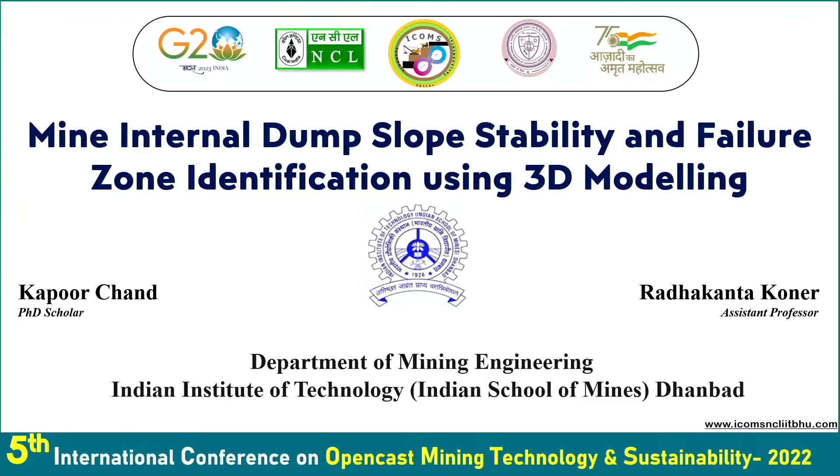Introduction: In India, major coal production comes from open cast mining, with 96% coal production from open cast mining. This mining method generates a large volume of overburden material in the mine area, and this material is accommodated in the form of internal and external dumps.

In the recent past, many dump slope failure events have occurred, resulting in the loss of human lives and mine machinery, causing production hampering, and sometimes damage to the haul way.

So in this study we are focusing on dump slope stability analysis using 3D modeling so that we can identify the failure zone and the stability of the dump slope.

Methodology: In this study we focused on three parts. First, data collection from the dump site. Second, failure zone identification using 3D modeling. Third, suggesting a mitigation approach for the failure zone.

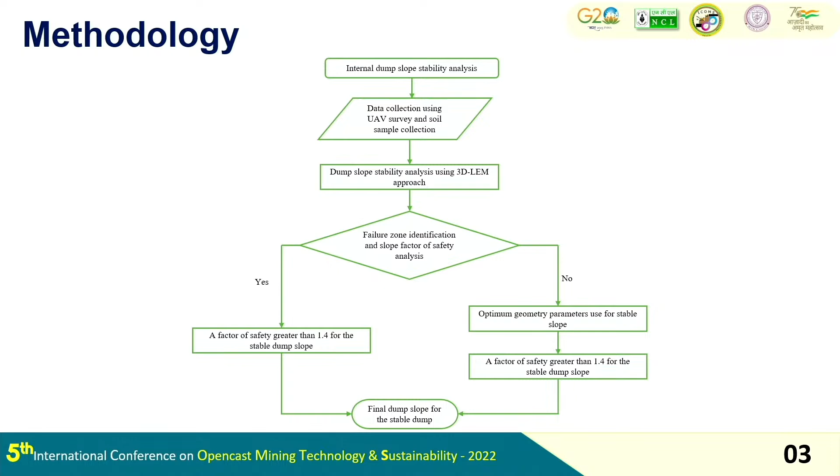In the methodology part, we are mainly focused on data collection because it is very important for slope stability analysis. Data collection is divided into three parts.

First part is the dump material data. This data is tested in the laboratory according to international standards so that we can identify the material property and density of the dump material.

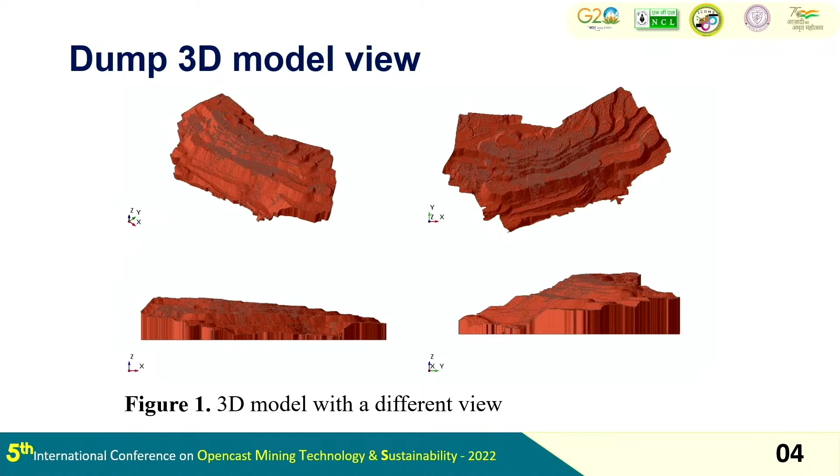The second part of data collection: we are collecting drone image data for the dump 3D reconstruction so that we can construct an actual and realistic model with proper image scaling, and analyze the critical zone in the mine dump.

For the third part, we are using image processing software, Pix4D and CloudCompare, to reconstruct a 3D structure. This 3D reconstruction will be in the form of a digital elevation model, which will be imported into Flac3D numerical modeling software for stability analysis.

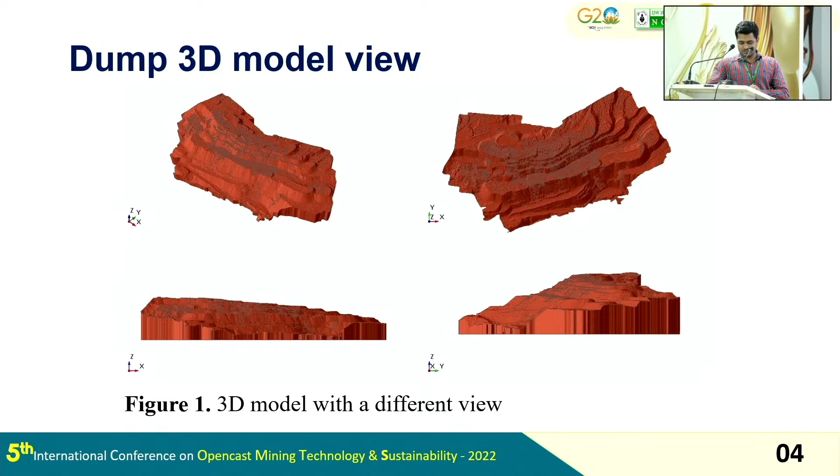This is the mine internal dump. This study is conducted in the Sonepur Bazari mine, and the total area of OB is 0.6 square kilometers. For the stability analysis, we are using Slide3D software.

It is a product of Rocscience, and for the stability analysis we are using the Mohr-Coulomb failure criteria. We are also using popular LEM approaches: Bishop, Spencer, and Janbu, and this result is for the static condition.

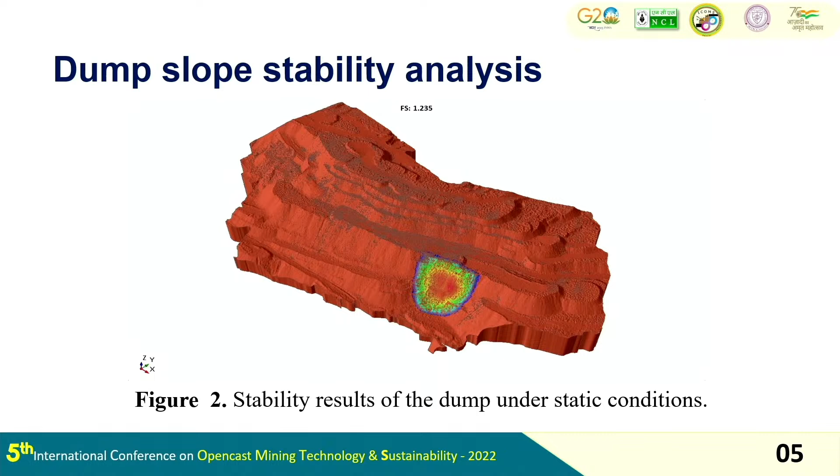The slope stability is also affected by dynamic loading and earthquake conditions. So in this study we are using pseudo-static analysis because our study area lies in earthquake zone two.

In this numerical model we assign a horizontal seismic coefficient for the stability analysis.

For the critical zone stability analysis, in this investigation we cut the model into multiple slices for detailed stability analysis, and the result is shown in the table.

For every section, stability analysis is done using Slide2D software, with the Bishop, Spencer, and Janbu methods used.

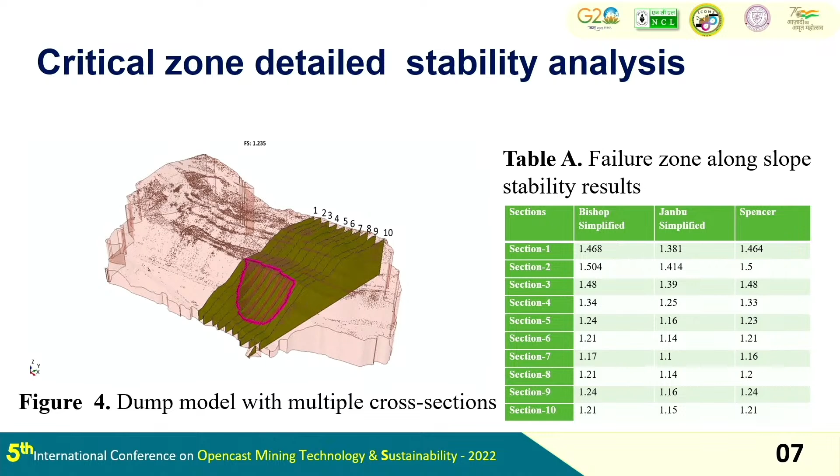This is our stabilization approach for the dump stabilization. In this approach, we are only focused on the bench width.

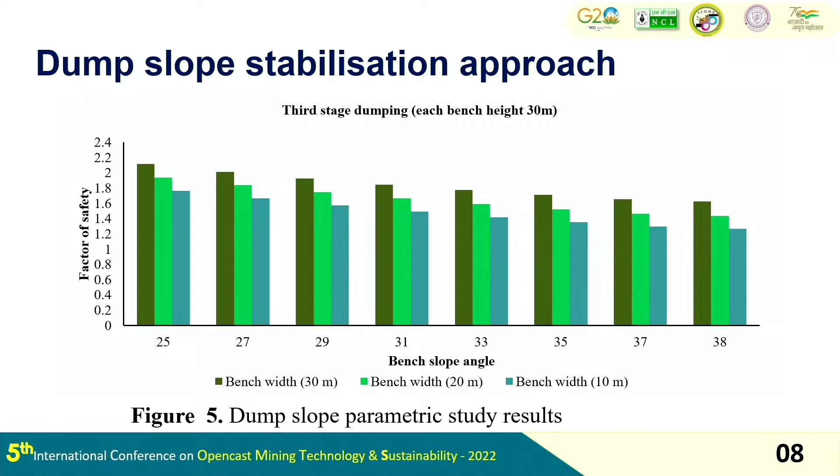In this result, we observed that as the bench width increases, the dump slope stability increases, and as the bench width decreases, the dump slope stability decreases.

This is the suggested optimum parameter geometry for the internal dump. In this parameter, we are only focusing on the bench width, with a slope angle of 38 degrees and a bench height of 30 meters.

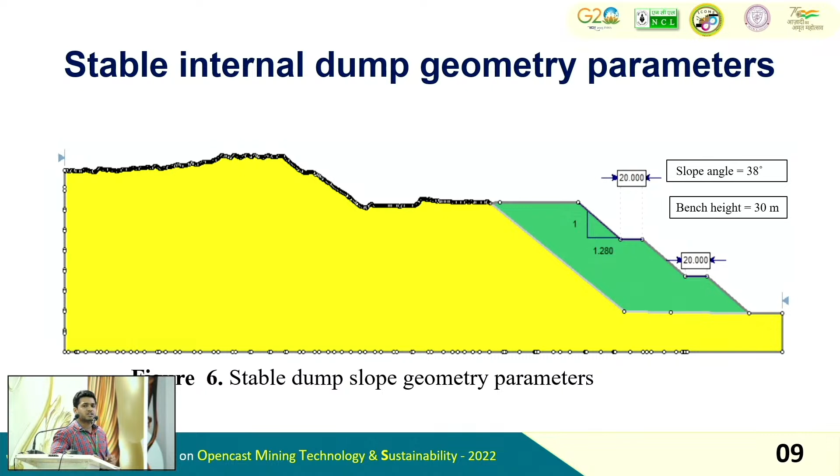This is the final result, comparing the present condition before and after implementing the optimum parameter for a stable slope.

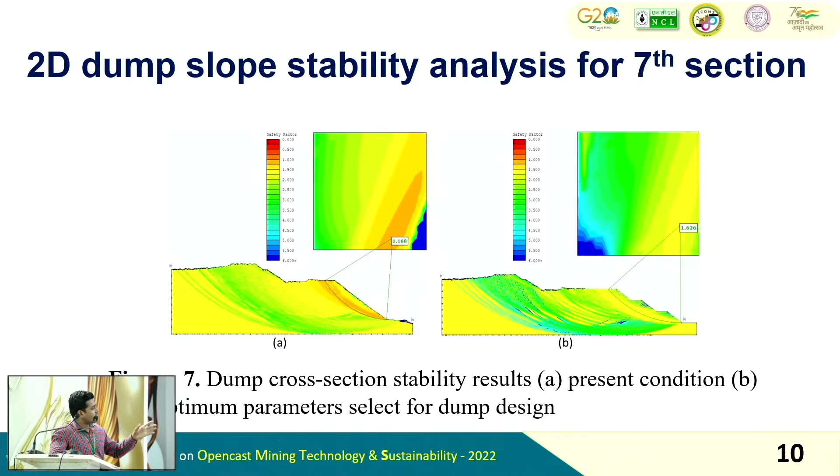Discussion: This investigation will be helpful for the mining industry for mine slope stability and failure zone analysis and its stability analysis. This investigation will also be helpful for landslide and man-made slope stability analysis.

This study is cheaper compared to other stability analysis methods, such as SSR and TLS.

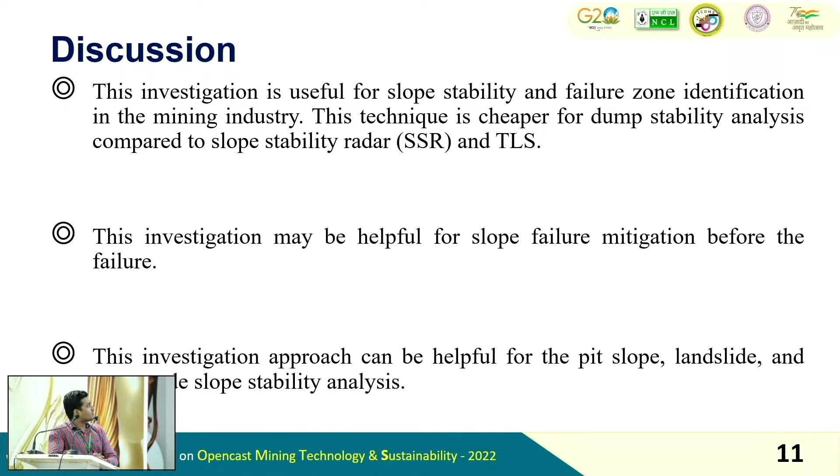Conclusion: the dump slope stability depends on the geometry and the strengthening parameter. The 2D numeric modeling will be helpful for designing purposes, but for failure zone analysis, we use 3D numerical modeling.

This work is supported by the Science and Engineering Research Board. Thank you.

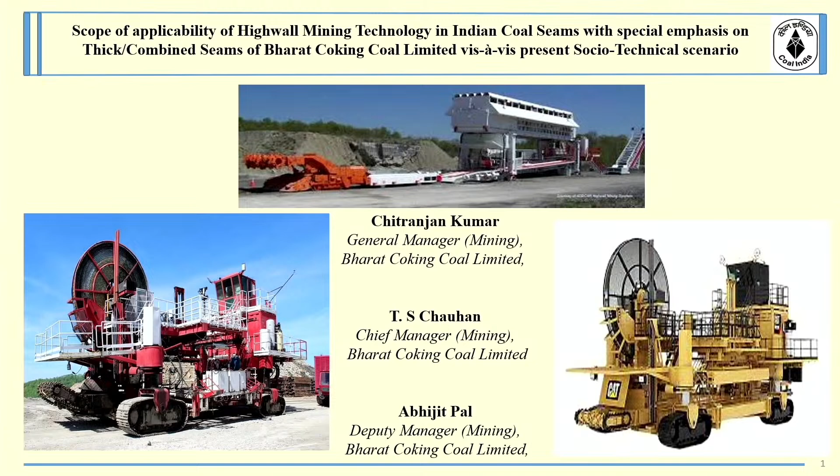Authors of this paper: myself Chitranjan Kumar, Area General Manager Block 2 Area BCCL; Tribhuvan Singh Chauhan, Chief Manager Mining Block 2 Area; and Abhijit Pal, Deputy Manager Mining in BCCL, Area 1.

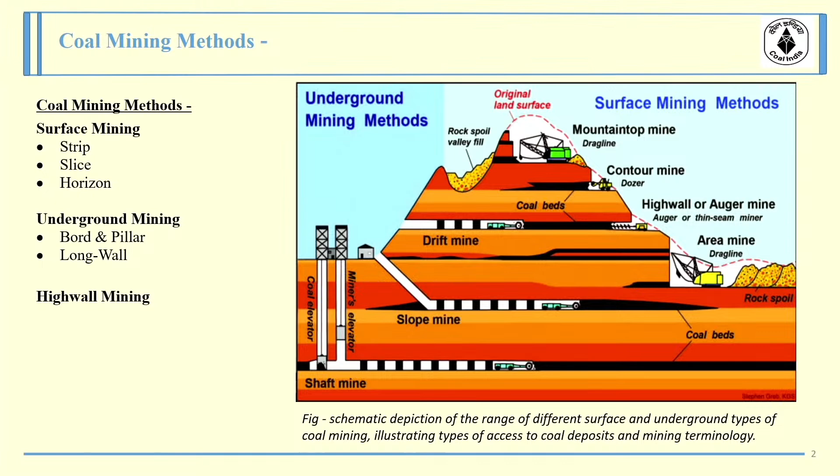This slide explains the methods of mining: surface mining and underground mining. Surface mining is categorized into three categories: strip mining, slice mining, and horizon mining, while underground mining includes bord and pillar, and long wall mining. This slide relates to that.

High wall mining is done where there is a problem related especially to land, which is the scarcest resource in the mining industry. Coal India is also thinking about applying high wall mining in different subsidiaries, mainly due to land acquisition issues. Wherever land is available but there is habitation over it, or a village is very near, we are unable to do underground or open cast mining. In such places, we opt for high wall mining, and I think 6 to 7 projects have already been awarded in this mode.

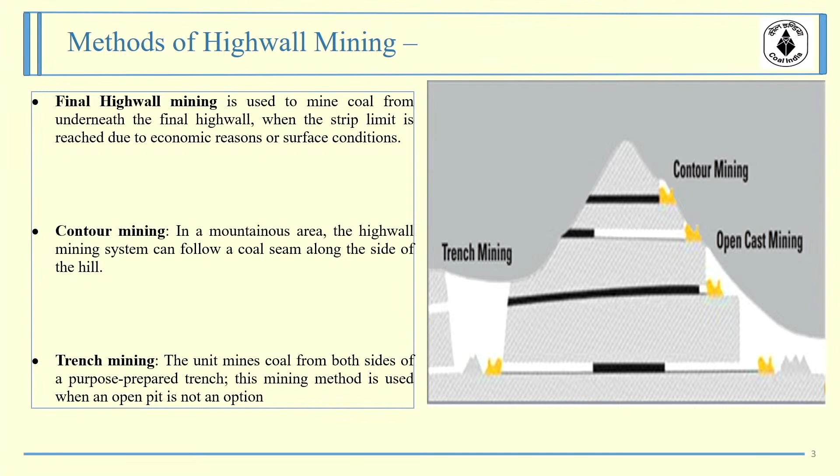All of you might already know about high wall mining. There is a cutter head which goes inside the coal seam up to a distance of 50 meters to 300 meters, which may even be longer. As far as the machinery is concerned, the width of the cutter head has been fixed at 3.5 meters. Most of the machines supplied are manufactured by Gainwell, and the width of that cutter head is 3.5 meters.

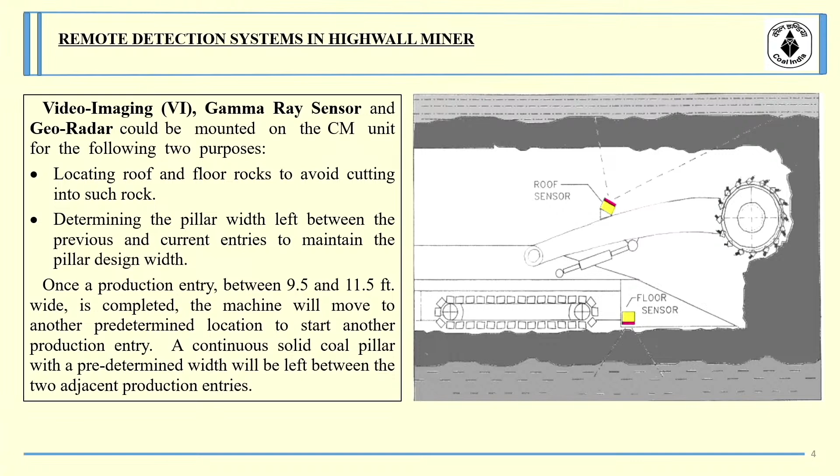You can increase the height up to 4.5 or 5 meters, depending on the thickness of the coal seam. But the width of the cutter head is fixed, and sensors in the cutter head sense the alignment of the gallery so that web pillars, meaning the pillar between two galleries, maintain proper alignment and constant width throughout the extraction of coal. Otherwise there may be a chance of collapse. Many sensors are fitted in the cutter head.

There's a sensor for measurement of hardness, in case you encounter any dike or sill. That sensor will sense it, and after that you can maneuver your action. The movement of the cutter head can be restricted or organized as per the hardness of the rock.

Potential for improving mining safety and health: in high wall mining operations, only the continuous miner and the push beam conveyor system go underground, while the miners and other mining and haulage equipment remain on the surface. Therefore miners are not exposed to common safety hazards associated with underground mining, such as roof and rib fall, because men are not going inside the gallery. So if there is a chance of roof or rib fall, there is safety.

Hazards with mobile mining equipment are reduced because it's manless mining, as no one goes inside the gallery. In case of mine fire and explosion also, there is more safety compared to underground mining. Exposure to coal dust that causes coal miners pneumoconiosis and other illnesses is also restricted to a greater and substantial extent.

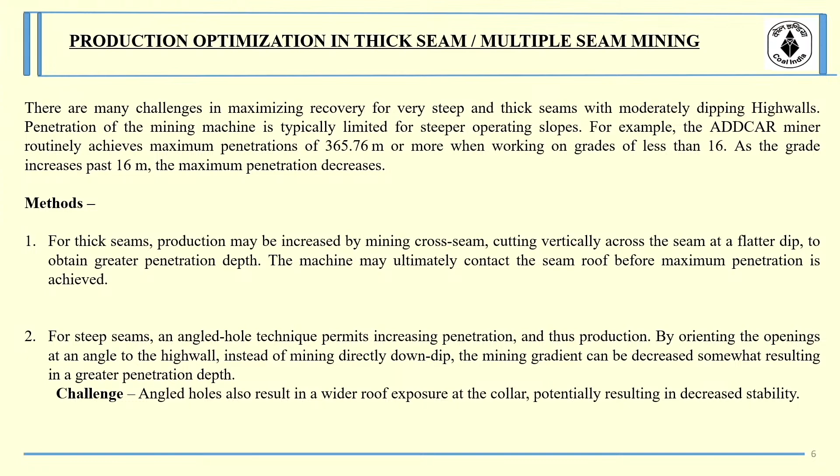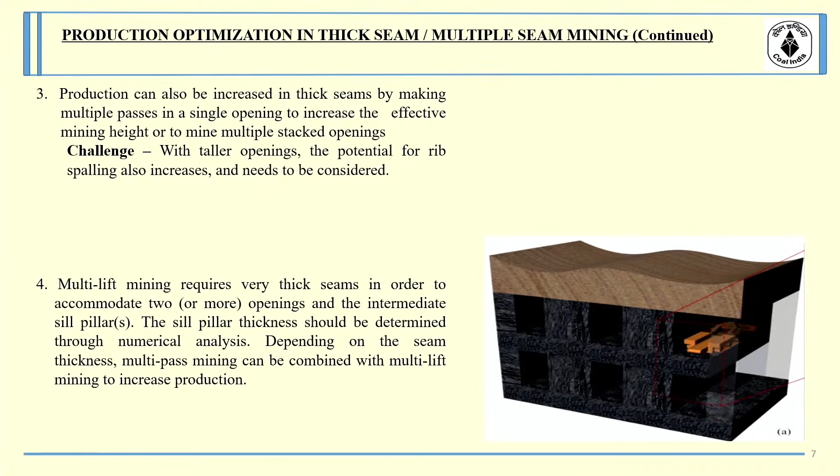Actually, at most places except Tata Steel, coal has been extracted in a single layer. In Tata Steel also, multi-level mining has not been done. In case of a 24, 25 or 30 meter seam, how can this be done? This is the question. How many layers should be there for extraction? Will there be stowing or no stowing? These are the questions, and how factor of safety of the pillars will be calculated in these conditions. This is a very important question for which we are presenting this paper.

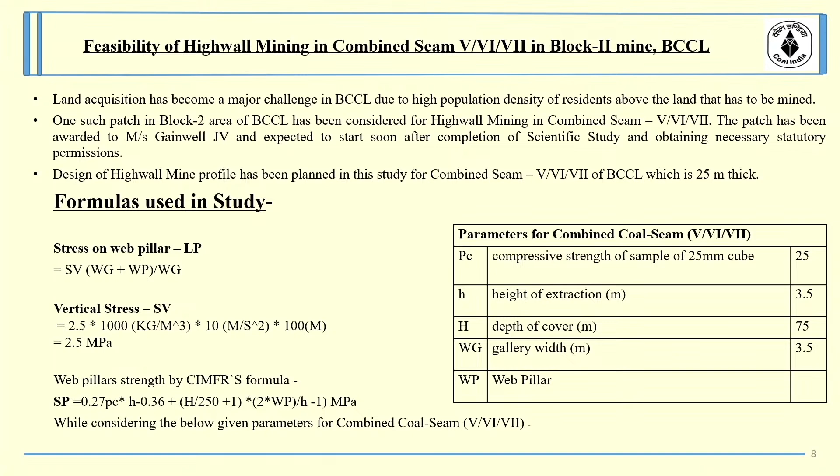This is the formula given by CIMFR. Stress on the pillar and vertical stress is calculated by this formula, and strength of the pillar is calculated by applying this formula. Factor of safety of the pillar is calculated.

In different papers related to high wall mining presented by DGMS and different academia, we have seen that if the factor of safety of any pillar is more than 1.5, that is considered safe for the purpose of high wall mining. So we are considering this 1.5 factor of safety, and going for further advancement in this paper.

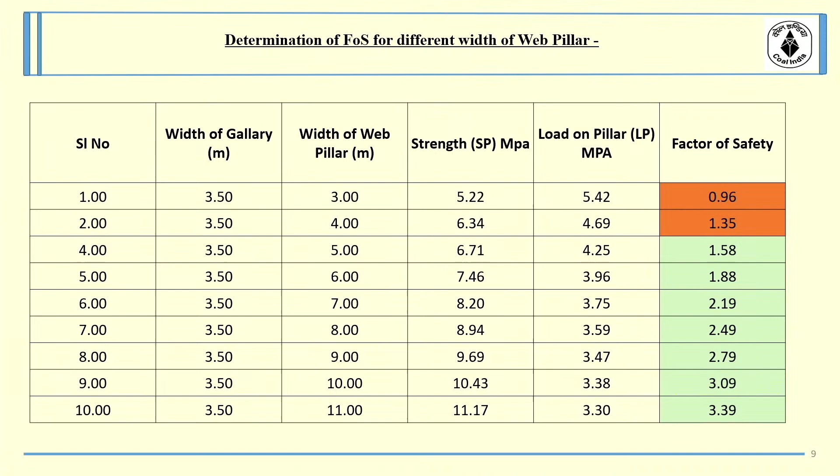You can see in this chart, the width of the gallery, meaning the width of the cutter head, is constant at 3.5 meters. Width of the web pillar is increasing, and with increase of width of web pillar, strength of pillar is also increasing. Load on pillar in megapascals is decreasing from top to bottom, and factor of safety is also increasing. It means for a seam, if you go further down, depth will increase, then factor of safety will decrease.

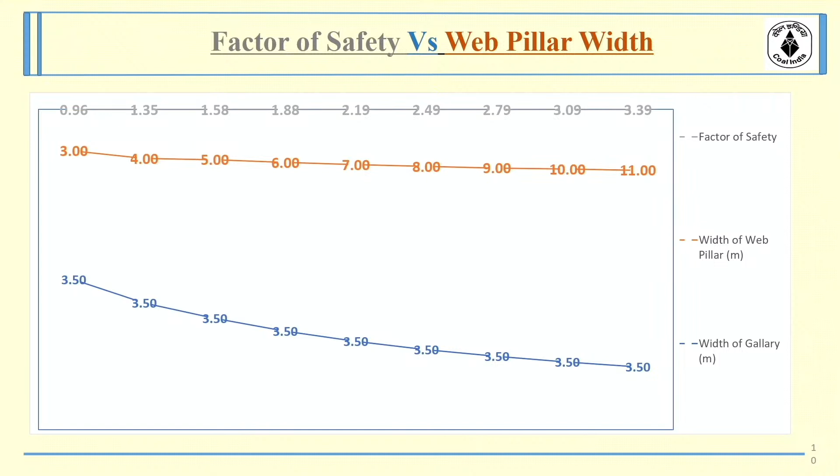And next, for thick seam which is more than or about 25 meters, we have considered depth cover 50, 60, 70, and in different conditions this has been calculated, factor of safety and percentage of extraction has also been calculated.

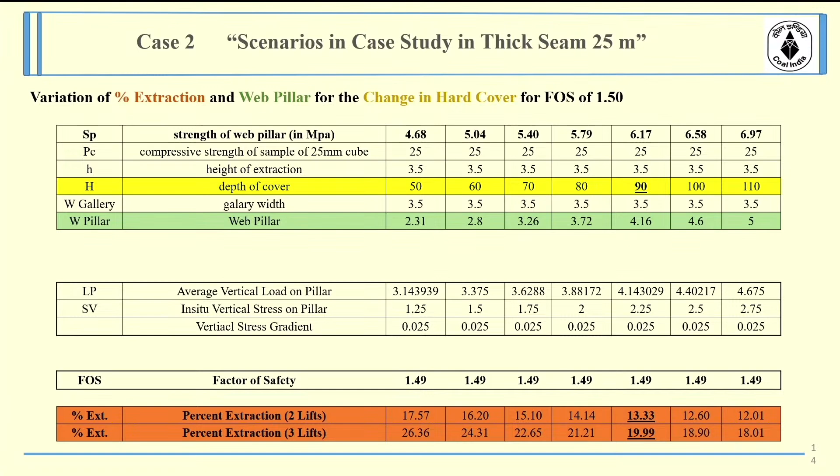Coming to the previous slide, percentage of extraction has also been calculated. You can see that if there are 2 lifts and 3 lifts, in that condition it has been shown what will be the percentage of extraction of the coal. And the same nature of graph, how that will increase or decrease depending on the depth and on the width of web pillar, that has been shown.

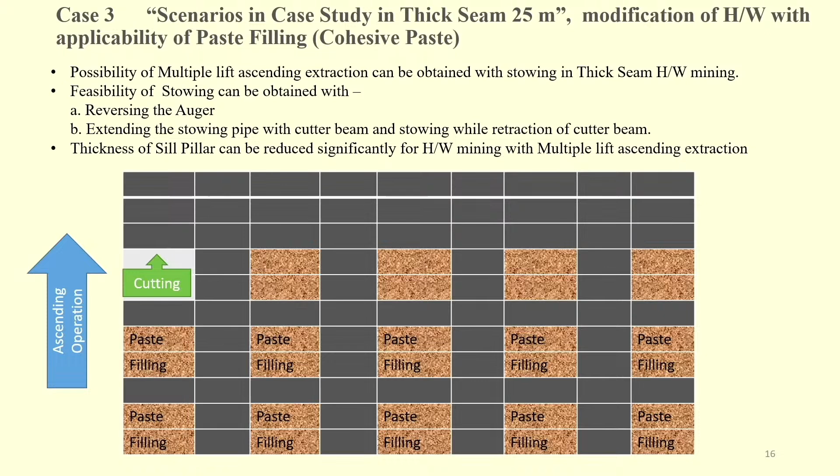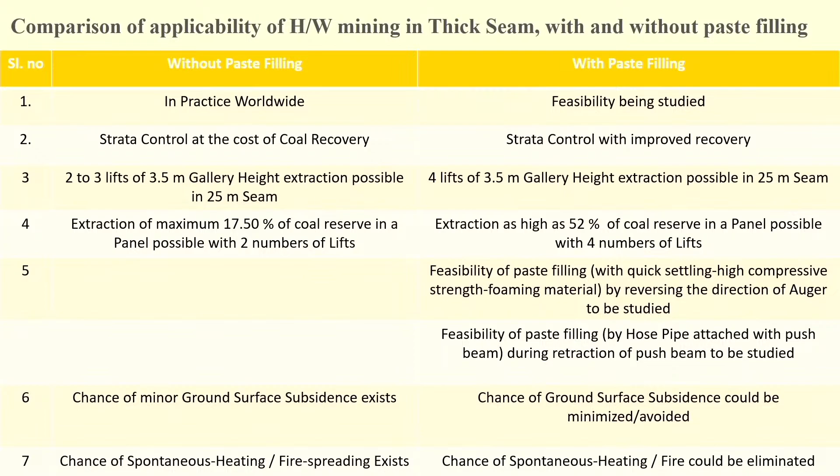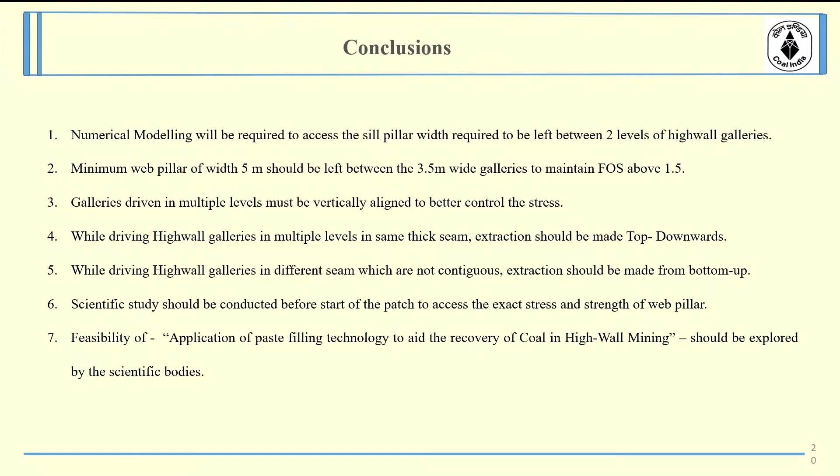Next, the same has been shown, same graph, this is without paste filling, what are the advantages and disadvantages of with paste filling. This has been shown, and the conclusion is that in that case we should go for high wall mining. It is a very good system, a safe system, and academia and scientific agencies are required to go for further studies and further research so that it can be made more feasible in present days.

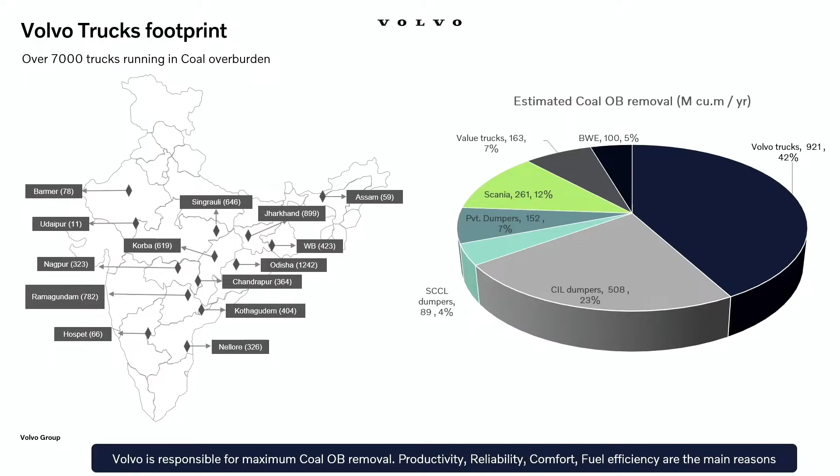One such feature is the inclinometer, which prevents the body from lifting while reversing the truck if the haul road or the dumping site is not proper—it will hold it instead.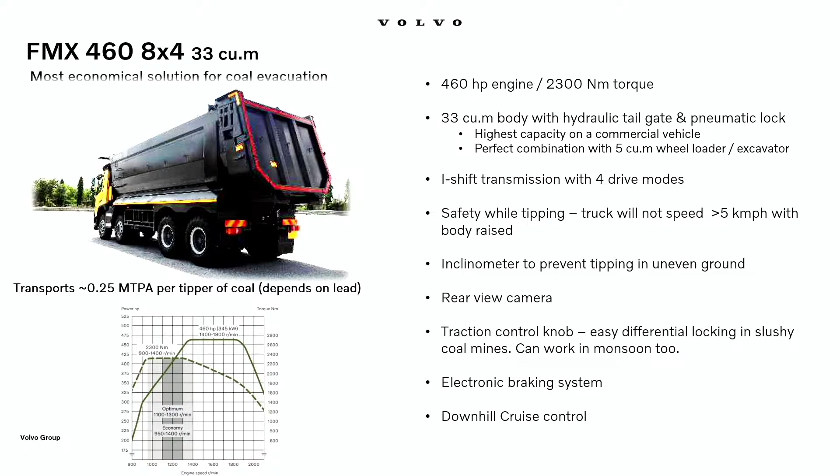As you see, the red color marks safety features. I don't know how much you know, but seat belts were invented by Volvo trucks. Our basic focus is on safety compliance, and we believe whatever we do should be a safe application for everybody. So various kinds of features are fitted which ensure active safety and safety compliance across all operations.

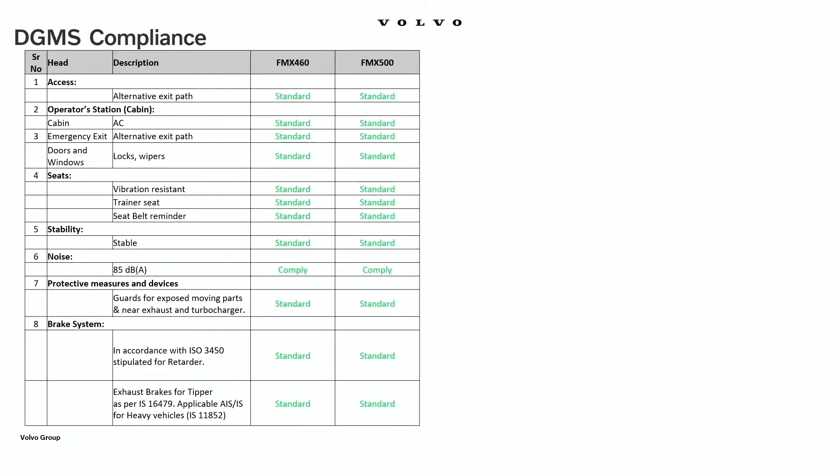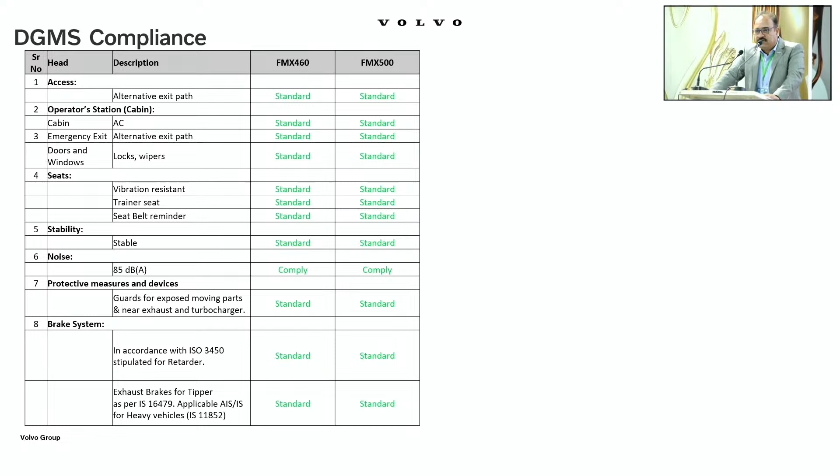These various features are standard on all our vehicles. There are a few items which are optional—if mentioned in the document, project, or DPR, we can definitely supply them at additional cost.

So it's not just a product—what we do is hand-holding, pre and post sales. Whenever a vehicle goes to our customers, we handle them with various initiatives: we give site advisory on what you should and should not do, the do's and don'ts at the site. We also regularly provide training to drivers and operators so that better fuel efficiency can be derived from our products, and we provide uptime care, which I'll explain in the next slides.

These are various initiatives we have taken to train project affected people. These photographs are from NCL, where we organized a driver training program—almost 80 drivers were trained, those affected by PAP. Similar activities are being done in other subsidiaries as well, in SECL and also in NTPC captive mines.

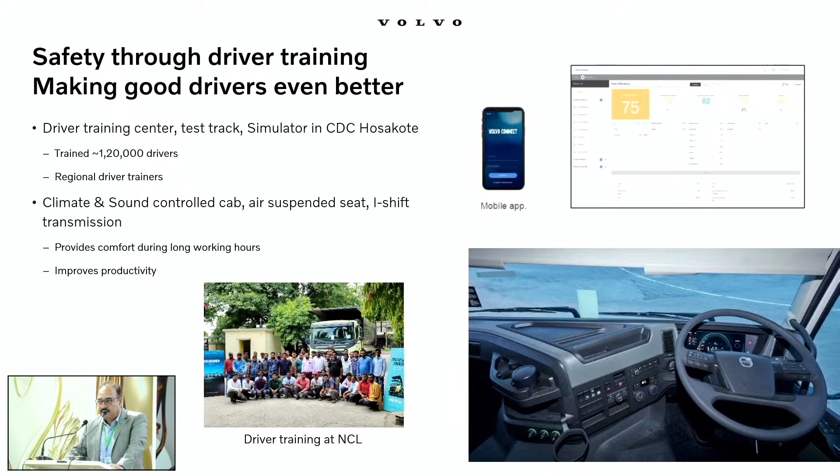These are the various USPs of the product. You may feel this is a product presentation, but this is the technology which, if adopted, can help us move towards sustainable mining for the future and also cost effectiveness.

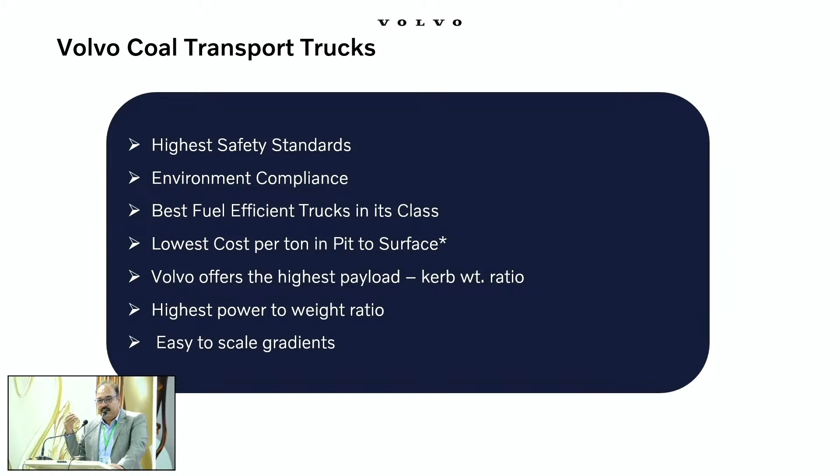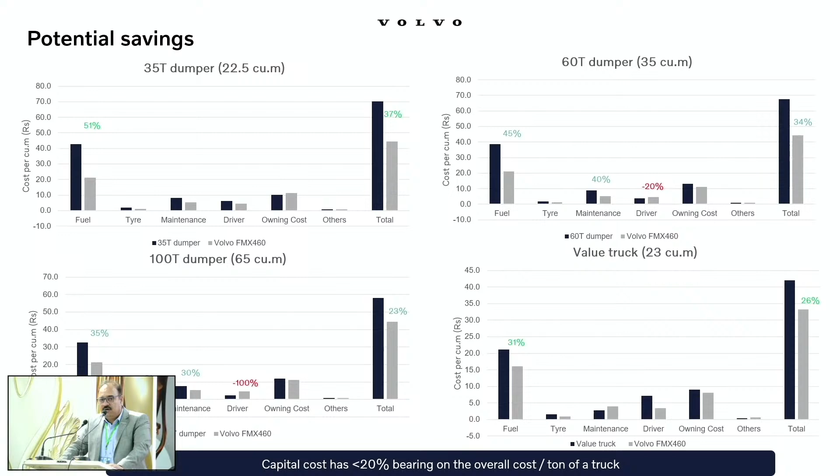These are the potential savings we are talking about: the 35-ton dumper, 60-ton dumper, 100-ton dumper, or a mass market truck commonly found in coal projects for coal evacuation.

We are also following the lines of what Coal India or MOC thinks—that coal should not touch the ground. So we are developing products so that coal can be delivered through the CHP to the end customer without dropping it or re-handling it on the ground. And also, as I heard this morning that we need to develop such solutions, we are working on developing this as well.

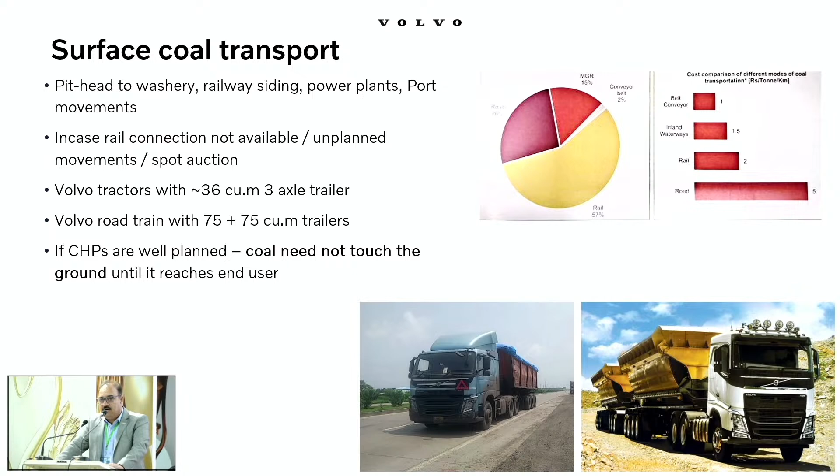This road trains concept, which we are trying to bring, will need dedicated mineral corridors, which I understand NCL is developing. With this type of application, in one load you can transport around 100 to 150 tons per trip. Similarly, in the morning someone mentioned this is being used in Australia. So this kind of operation, this kind of product, we are trying to bring to India.

Next, this is also one of the biggest concerns while transporting. We have observed that coal dust is spreading, and because of that they need coal cover. We have the solutions ready, and if required we can supply them along with the vehicles.

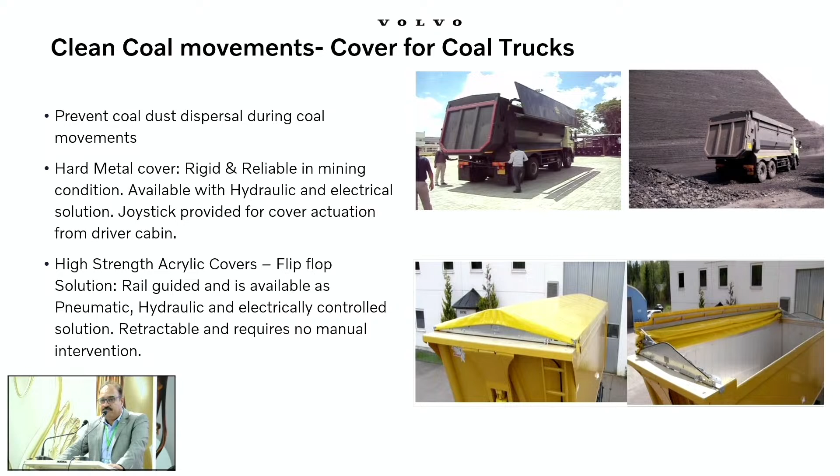Next, this is a very important thing. For example, we visited one site, one project, where I mentioned that our vehicles are compliant to the latest pollution norms. They said, sir, pollution here is already so high, what difference does it make? But even a small change can reduce it, like the target we have to reduce CO2 emissions. We need to move towards this.

Next, these are various initiatives we have taken to support our products and customers. Thanks, next.

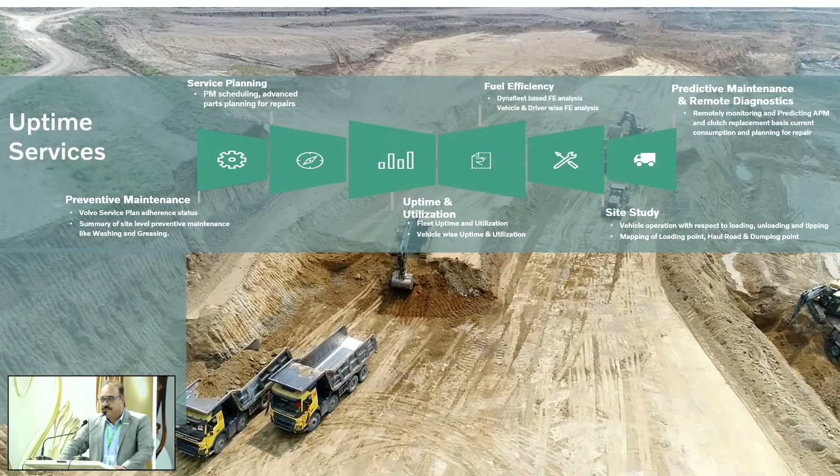These are the various ways, this is how we support our complete solutions across India. These are the developments of that.

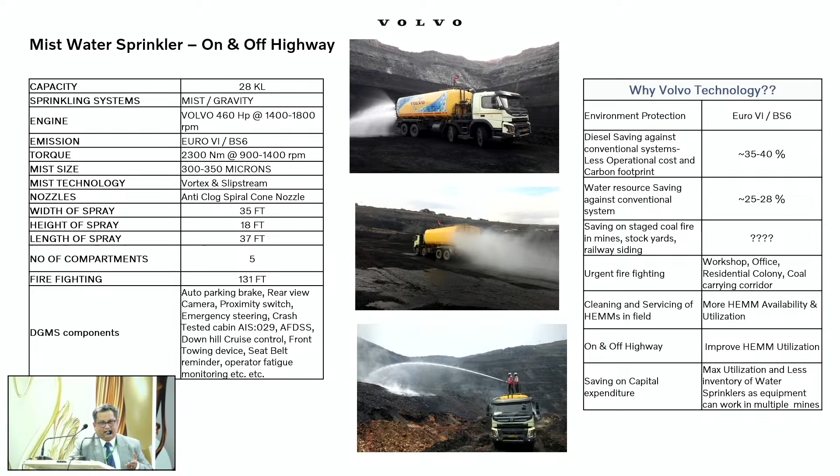It also works on and off, since we know water sprinklers don't need to run for the entire shift. So this same water sprinkler, after working deep inside the mines, can get outside to the colonies or coal carrying corridors where hazards can be reduced. It is fitted with all the DGMS components required. And even in the rainy season, it can also help clear the muck in the drainage areas.

You can also go for the servicing of heavy earth moving equipment without getting it into the workshops.

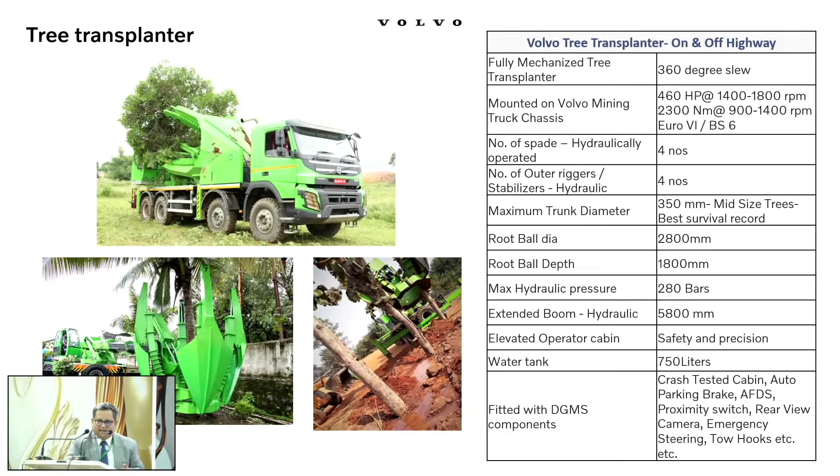The next innovative solution, which is again an in-house development, is the tree transplanter. We always believe that planting shrubs or seedlings cannot compensate for the environmental loss caused while propagating mines and cutting huge numbers of trees. Research shows that mid-sized trees have much better longevity and life, so we developed this mid-sized tree transplanter, which is working inside mines.

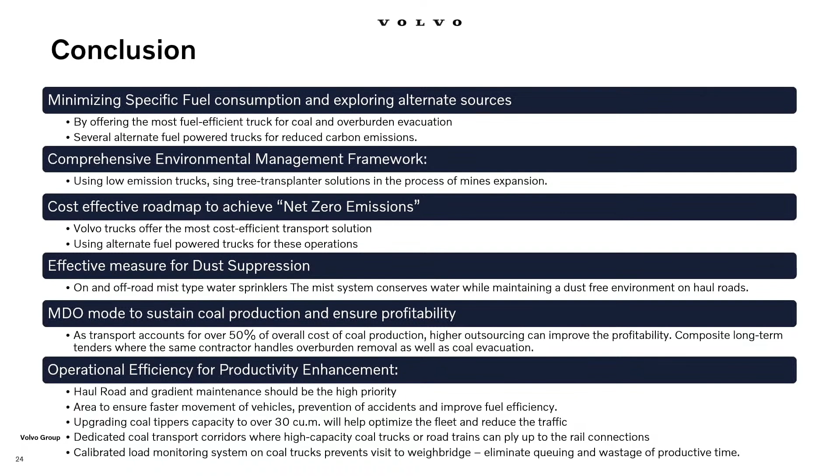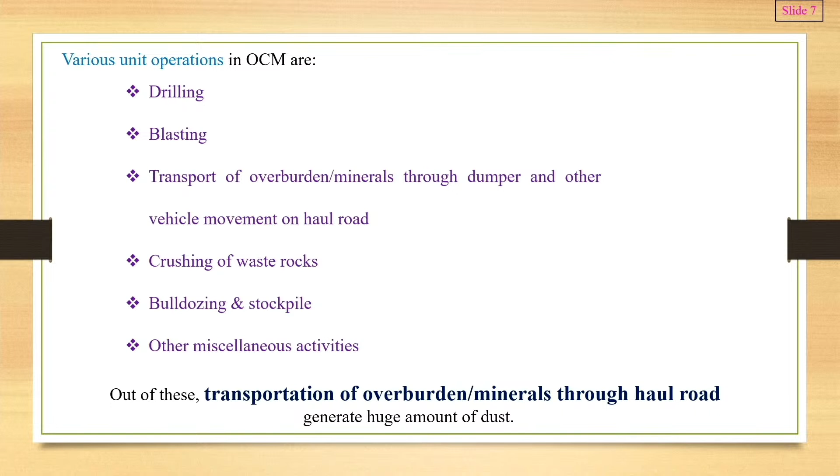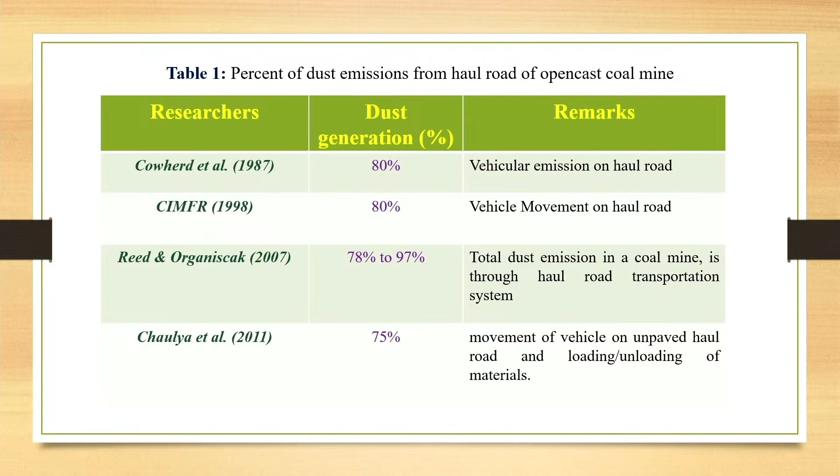In some research work, we observed that 80% of the dust generated is only due to the haul road, due to the movement of dumpers, approximately 78 to 97%.

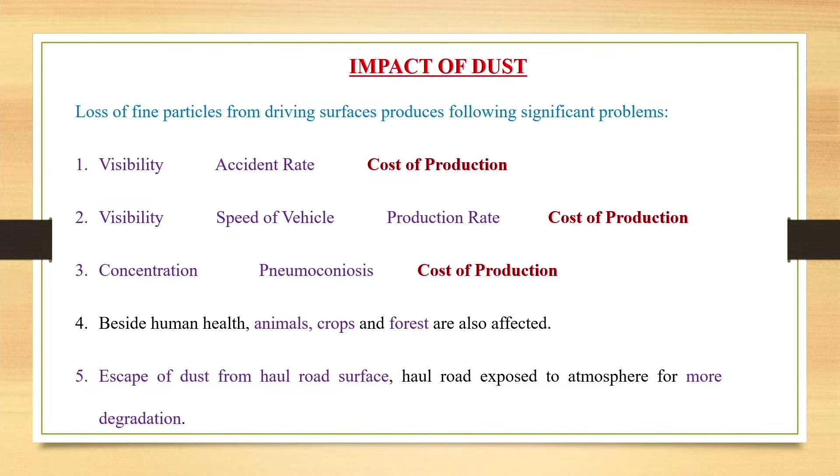The generation of dust can reduce visibility, increase the accident rate, and increase the cost of production. So how to control the generation of dust? There are various techniques available.

There are four different techniques: first is the administrative method, second is the mechanical method, third is water spraying, and fourth is the chemical method.

The first one is the administrative method. In this method, we have to limit the speed of the vehicle, or reduce the loading of the dumper, or limit the intensity of vehicle movement, but this method reduces the targeted production, so it is not more preferable.

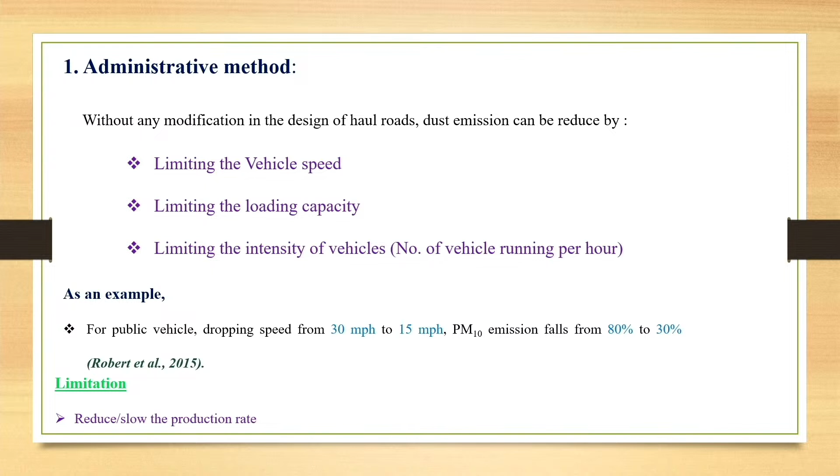So we go to the next, mechanical method. In this method we have to construct a permanent road, but it is not possible for all types, because some haul roads are semi-permanent and some are permanent, but we cannot construct a permanent haul road everywhere, so this method is also not applicable.

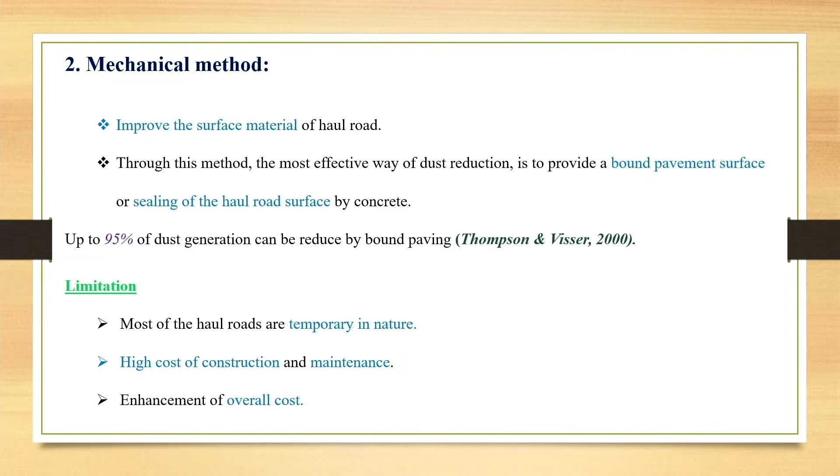Third, water spraying. This is most commonly used in the mining industry to control dust by spraying water. But there are limitations in the summer season, because when the temperature is very high, water consumption is more, and spraying of water approximately 7 to 8 times a day is required.

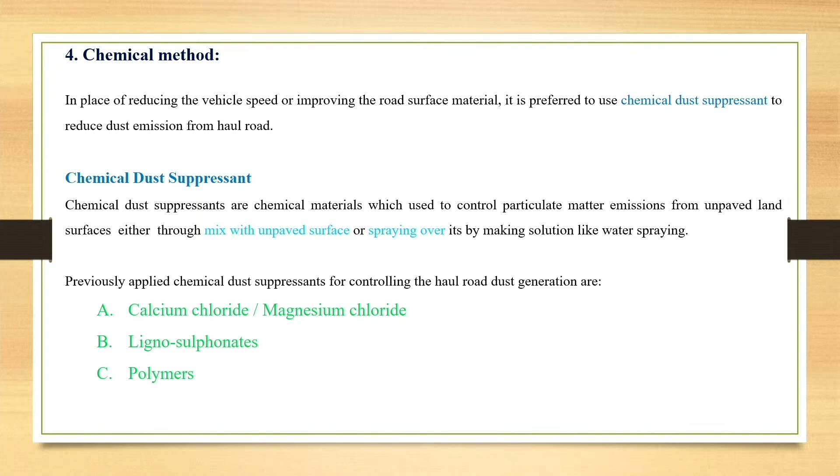So chemicals are mixed with water that can reduce dust emissions by increasing moisture sustenance. There are three different types of chemicals available: calcium chloride, lignosulfonate, and polymer. The first two cause soil erosion, so they are not used in the mining industry. So now we go for polymer. Different types of polymers are available that can mix with water and increase the moisture sustenance of dust.

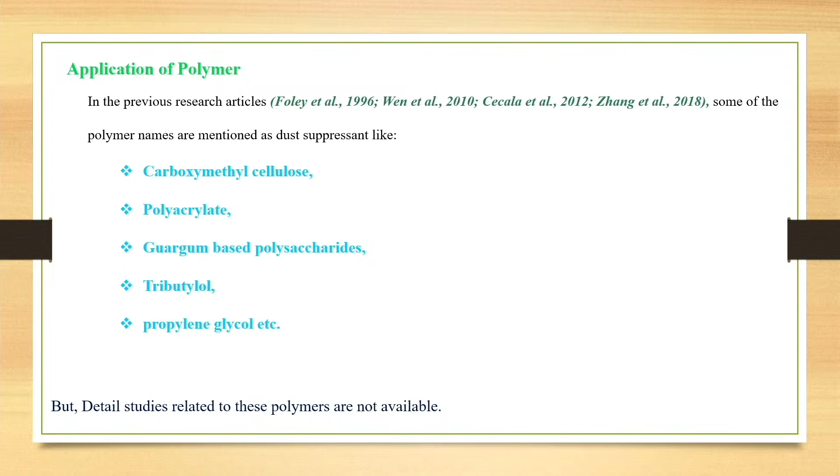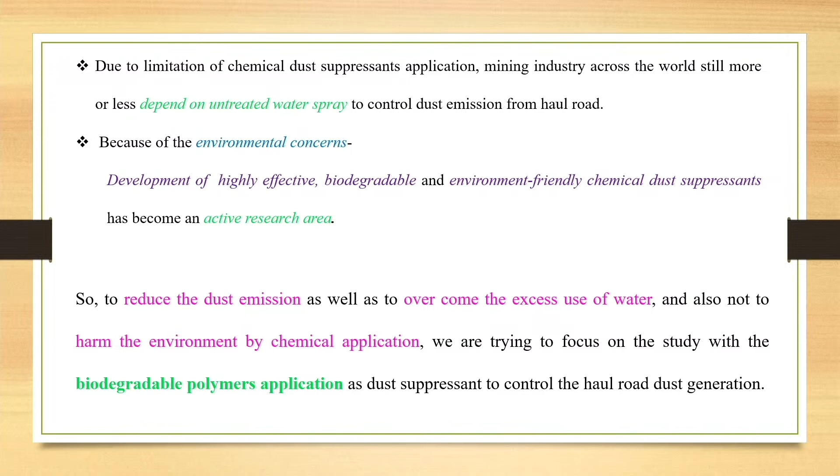Why have we used polymer? Because it is highly effective, biodegradable, environmentally friendly, and a chemical dust suppressant that can increase the moisture sustaining capability of the soil.

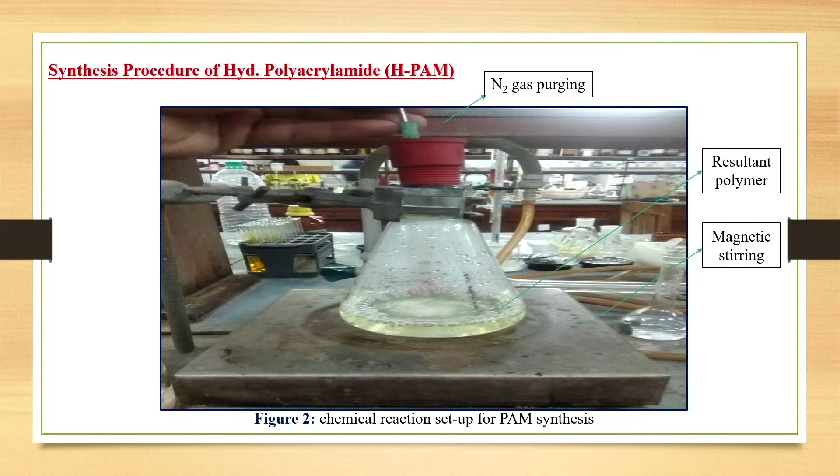Next, the experimental method. We collected samples from the Dhanbad mines. This is the process of making hydrolyzed polyacrylamide polymer.

Next is the methodology: how to do it. We took 500 grams of the dust-water sample and mixed it with 10 mg of the polymer.

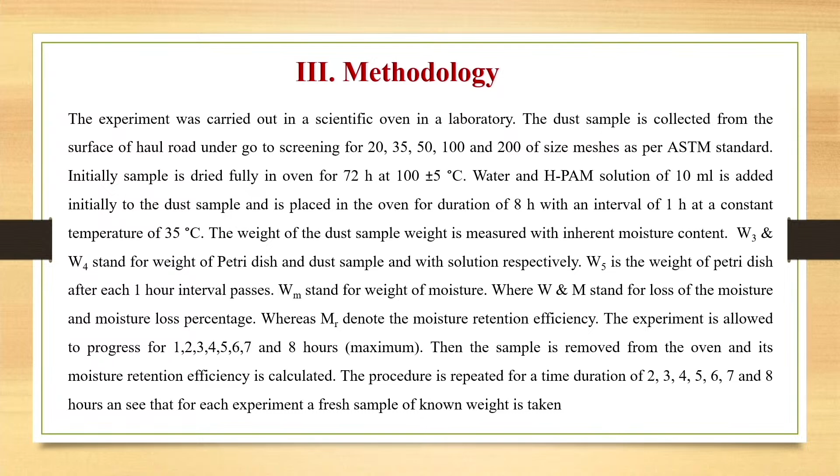We have to test at three different temperatures: 25 degrees Celsius, 35 degrees Celsius, and 45 degrees Celsius, at different hours. For example, we have to measure after 1 hour, 2 hours, 3 hours, up to 8 hours. This one is the reducing weight and how much moisture can be sustained. We have to observe that.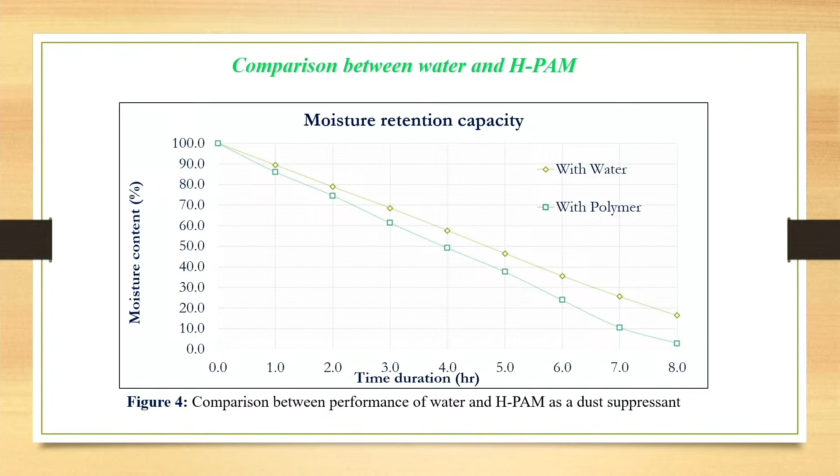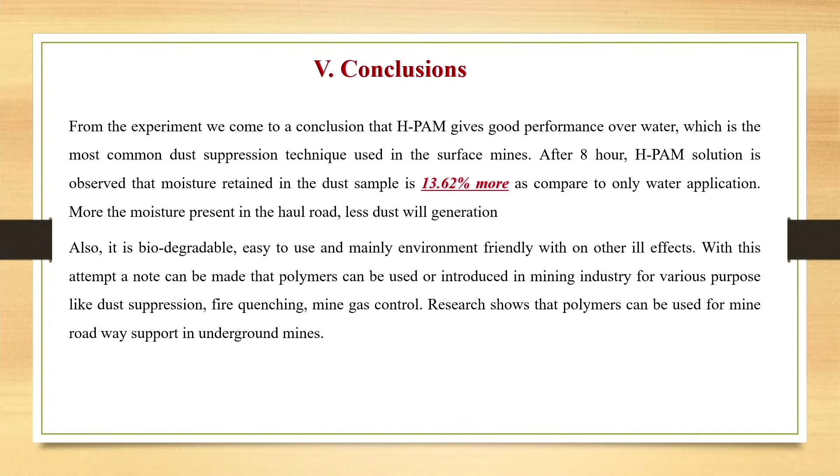This is the conclusion. The increase in moisture sustaining capability is 13.62% as compared to the water used in mining industries. So we have published 4 papers on this topic in reputed journals, using different polymers. I will only present one polymer here.

So the next work is to perform a case study. If they give permission, then definitely we have to do the experiment in real life. Okay, thank you. Thank you.

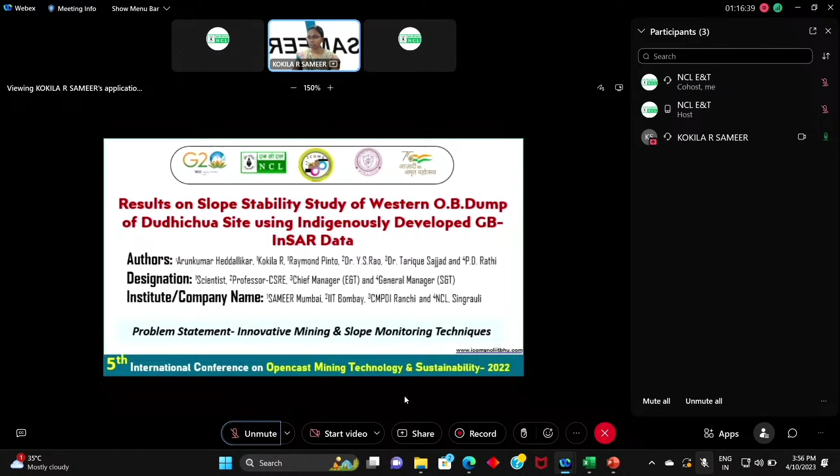One of the major causes for mortalities in mining operations is slope stability accidents. The unexpected movement of slopes can cause danger to human lives as well as destruction to equipment and properties. And we need a robust system to give early warning about such unexpected events.

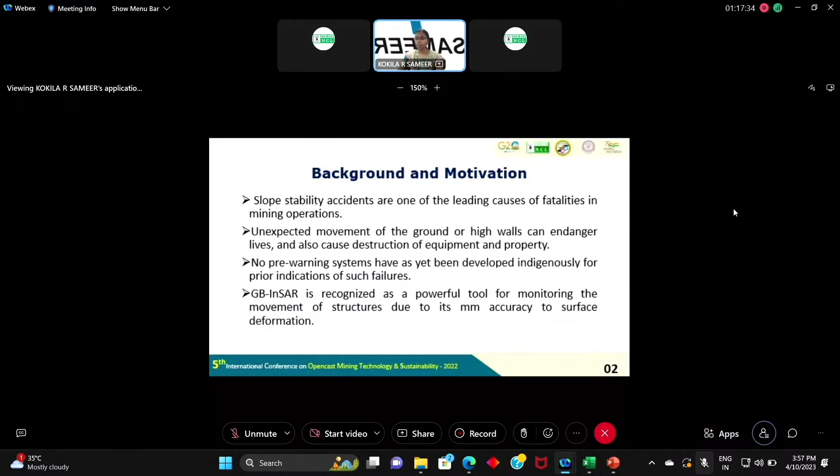Worldwide, there are very minimal such systems available in the market. But in India, there are no such pre-warning systems yet developed indigenously for prior identification of such failures. And this GB-InSAR developed by SAMEER, CMPDI and CSRE is the first indigenously developed system, recognized as a very powerful tool

for monitoring the movement of structures due to its level of accuracy for surface deformation. So the main objective of the system is accurate detection of slope stability by comparing and analyzing the synthetic aperture radar data of the same scene over different time intervals.

So in order to get the deformation, the level of deformation, we need to have some stable pixels. We will not analyze all the pixels. So in order to get the permanent scatterers, there are various parameters to be considered. One such important parameter is the coherence. This coherence estimation plays a major role in masking out the very low quality pixels in the synthetic aperture radar image. Application of a threshold to such a coherence map will give highly coherent pixels.

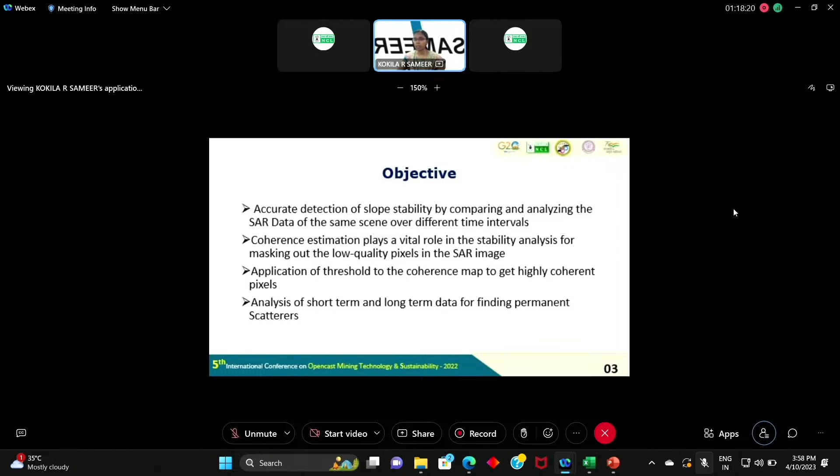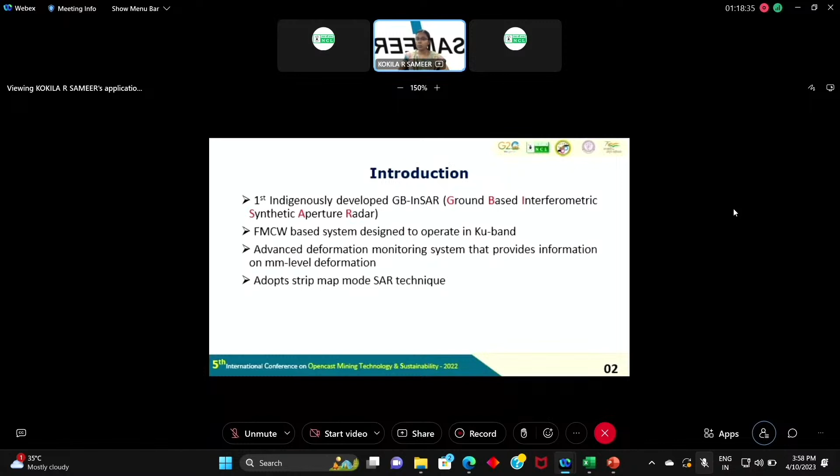So this indigenously developed GB-InSAR works on FMCW, frequency modulated continuous wave system. It is designed to operate on Ku band. So it adopts strip map mode synthetic aperture radar technique.

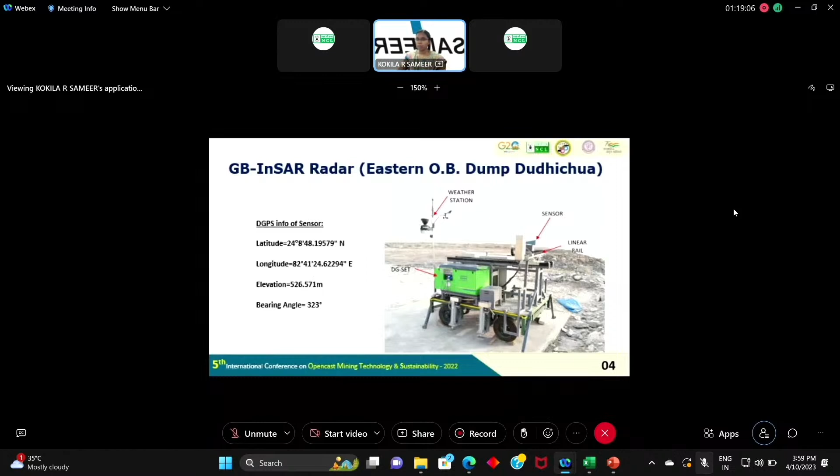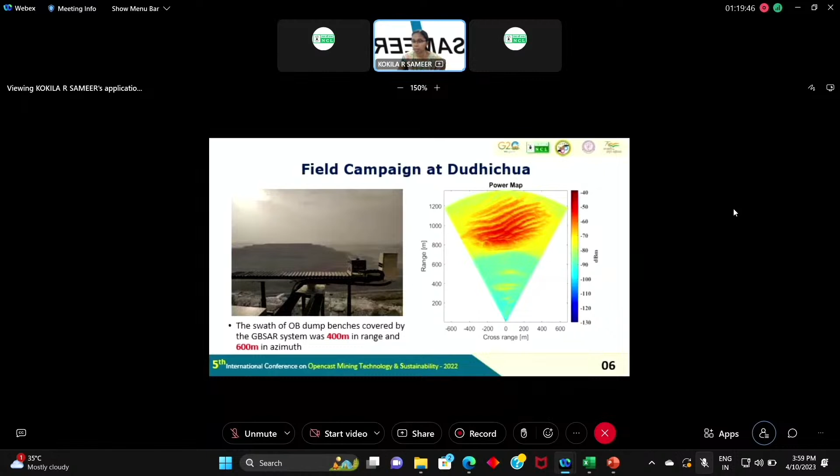So first, what is coherence? It is a measure of similarity between the SLC images of the same scene acquired at different time intervals. Here, higher the coherence value corresponds to more stable pixels.

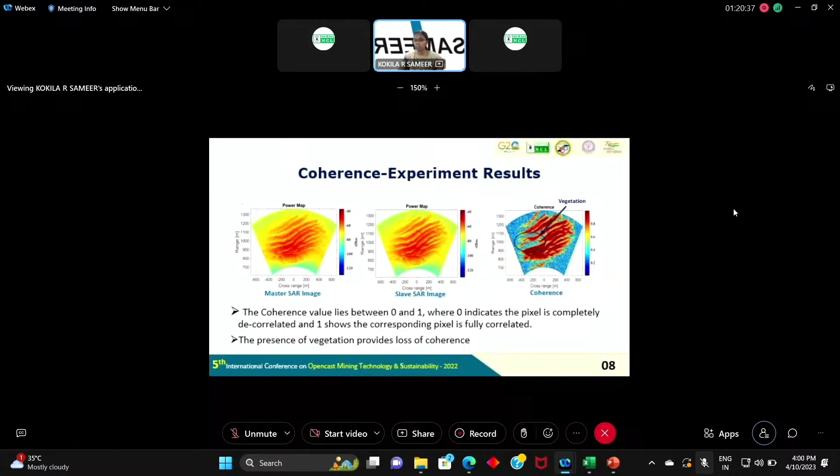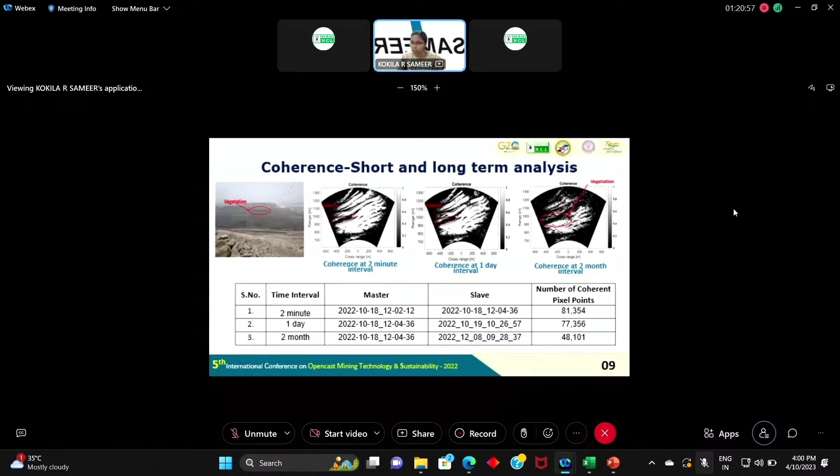This result shows the short-term and long-term analysis for slope stability. We have conducted an experiment for a 2-minute interval, 1-day interval and 2-month interval, where we can see that the lower dump benches have more stability compared to the upper dump benches. Here we can see the number of coherent pixel points is more than 40,000.

The significance of the experiment is that we have identified the height of each OB dump bench slope, which ranges from 30 meters to 50 meters considering all the overburden benches, and the road width is between 10 meters to 50 meters. By identifying the vegetation area, the height is about 35 meters and the width of the vegetation area was 320 meters. So here we have set a look angle of -10 degrees.

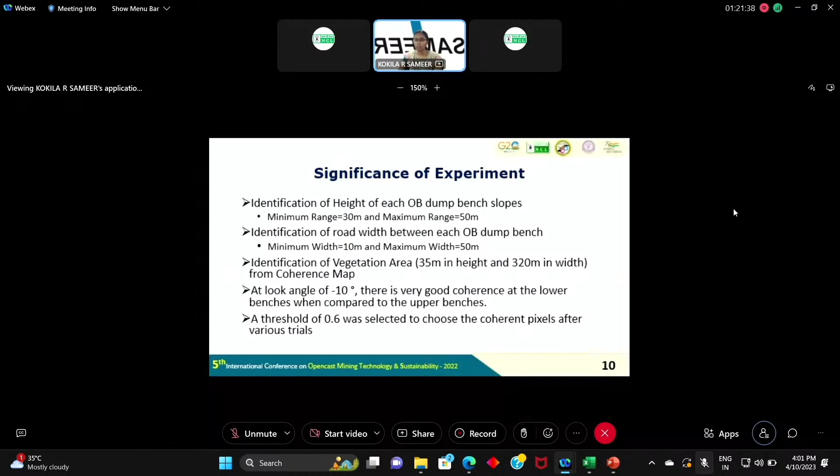At this look angle, we can get very good coherence at the lower benches compared to the upper benches, and here we have selected a threshold of 0.6 to choose the coherent pixels.

So here I'm concluding that high quality coherent pixel selection helps in generating the displacement map for slope stability analysis. With a 2-day time gap, we found very high coherence in overburden benches covered by soils and rocks, and there is no coherence in the vegetation covered area.

Coherence between 2-month data showed very good coherence at lower benches. Along with this coherence threshold, we can take the amplitude dispersion SNR parameter also to get stable PS points for slope stability analysis. After identifying the stable PS points, we can use these PS points to find the deformation information.